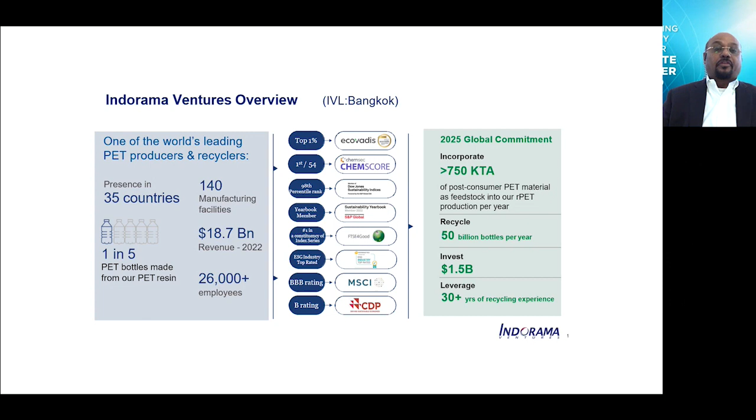So in 2019, Indorama pledged to Ellen MacArthur Foundation that IVL will recycle 750,000 tons of PET by 2025. And that is an equivalent of 50 billion bottles per year. Today, we recycle about 30 to 35 billion bottles in a year. This whole thing will take about $1.5 billion of investment. And we are very well on our way to reach this capacity.

So now to talk a little bit more about PET and recycled PET capacities worldwide, you can see its disproportionately large presence in Asia with next presence in Europe and North America. The numbers we are providing are installed capacities. So installed capacity of PET is approximately 35 million tons worldwide, of which Asia is the largest with 23.3 million tons, followed by Europe at 4.9 million tons and North America at 4.6 million tons. The other regions do have some smaller capacities.

The global utilization rate of PET plants, depending upon the year, the number of force majeures, or other constraints like logistics, usually ranges from about 70% to about 80%. Now, you can also see the installation of recycle capacities worldwide with about 20 million tons of installed capacity. Again, there Asia leads with about 12.6 million tons capacity, followed by Europe at 3.3 million tons and North America at 2.4 million tons.

But when you look at recycled PET, the capacity utilization is not as good as that of virgin PET. It's lower, and mainly it is caused by the collection rates. The availability of raw material to these facilities is limited, and that is one major reason.

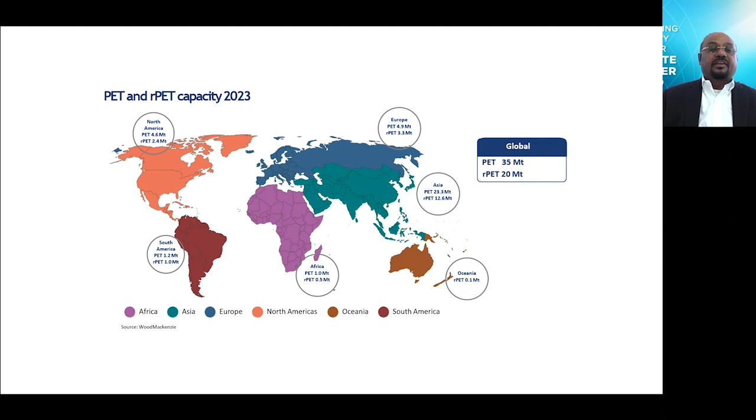Now, having said that, what exactly is Indorama doing in this recycling capacity? I already mentioned that we have this commitment to reach 750,000 tons by 2025 and then double it to 1.5 million tons by 2030. So, even during the pandemic, in the last 4 years, we have added 9 additional sites globally. All the sites marked with green are new sites that we have either built, expanded or acquired. So all this is what we are doing in the mechanical recycling space.

Now, in the mechanical recycling space, what have we done on the technology front? We have developed our own in-house technology for washing the bottles. We deploy state-of-the-art robotics in our plants, especially in regions where it is very difficult to hire people. Our focus is more towards circular economy. So we are installing rPET lines or pelletizing lines, using almost all of the latest generation systems, which can provide the best possible quality, consistency, and the best level of decontamination.

Now, to complement this mechanical recycling, we are also engaged in the commercialization of novel chemical recycling technologies. At Indorama Ventures, we don't do basic research on chemical recycling ourselves, but we do work with technology providers. From a European perspective, many of you might have seen that we have signed up a venture with Carbios to set up a chemical recycling plant in France. At the end of the day, our idea is to ensure that no part of the PET package ends up in landfill.

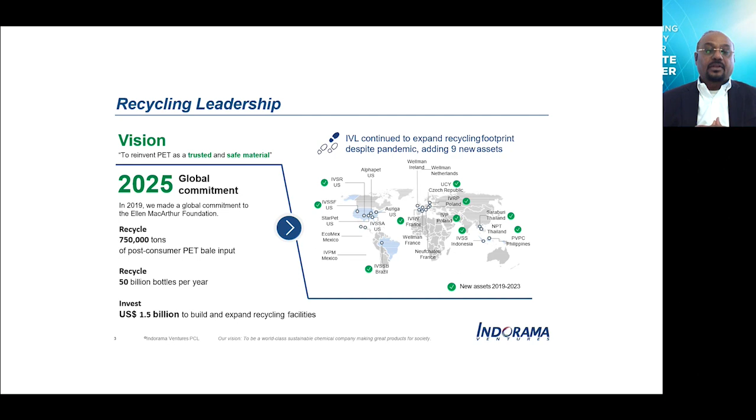Now, why PET? I think I'm preaching to the choir, but still, I will let you all know that PET is the most versatile polymer out there. Whether you are using it in packaging, textiles, industrial, automotive, or hygiene markets, in every industry, PET has the best presence. We all know its attributes like light weight, transparency, clarity.

But on top of all that, it is the most recycled polymer by a big margin when compared to any other type of polymer like polyethylene, polypropylene or polystyrene. And virgin PET comes with the least carbon footprint, and that carbon footprint goes down a lot further when you recycle it. It also competes with quite a lot of other packaging substrates like aluminum, glass, and paper.

So I have given a very small snippet of the LCA comparison, but there is a very recent LCA study that was released by NAPCOR, an industry association for PET in North America, and you can refer to that. It's a more recent study. And so conversion from other polymers and from other substrates to PET continues to happen.

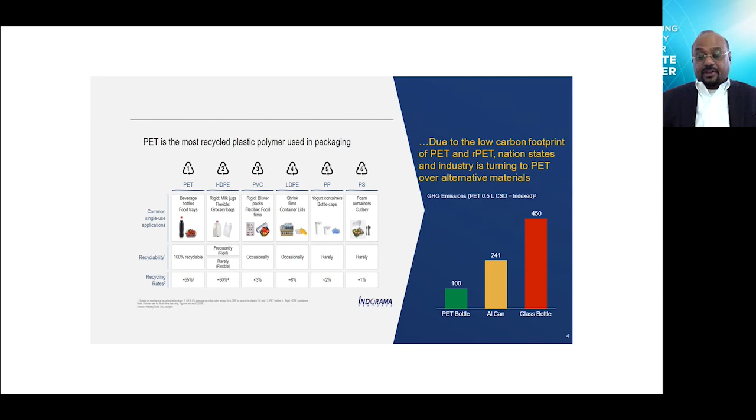But that's not all bad news. I can give you some examples. For example, in the US, the waste management companies have very recently announced big investments in retrofitting some of their material recovery facilities. And that is very good news, and it is very welcome news also.

Now, on the consumer behavior side, the most important aspect that Indorama is focusing on is to educate the consumers. And we think educating people when they are very young is the best way to do it. So we have started, and I think we made a public announcement about it a day or two ago,

wasteheroes.com. This is a website where you can freely download educational material, with levels from kindergarten all the way through high school. And it's done in multiple levels like advanced, medium, all that. And on top of that, it comes in multiple languages and it comes with instructions for the teachers on how to do it. One very important point to note here is this is neither PET centric nor talks about IVL.

This is about handling waste and to educate consumers, especially younger consumers, on the importance of how to handle waste. So, that's one thing on the consumer behavior we do.

And then on the regulation front, many countries are doing the right thing by having deposit return schemes or extended producer responsibility and other collection schemes. Quite a lot of other countries are following. They have announced implementations, but many of these implementations are either slow or not in the right direction. Those things have to improve; that's a big challenge that we need to address.

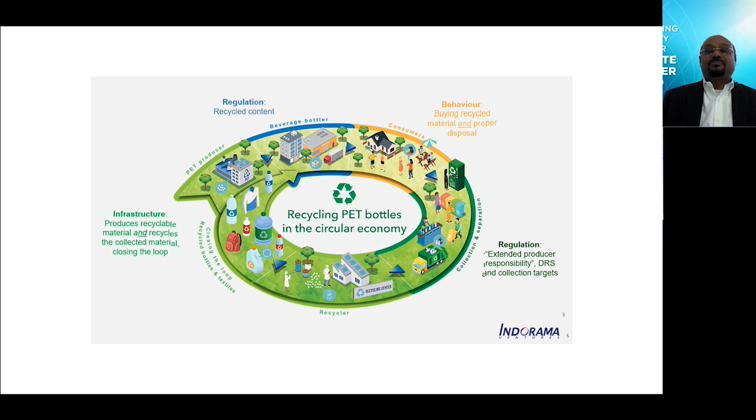Thanks, Shankar. Thank you very much indeed. That's even better than I expected. It's more than just food for thought. That's a banquet. We look forward to following what's happening with IVL in the years to come. And indeed, probably later on this year, we'll see such expansion.

That's great. So next up, we have Paolo De Nardi. Now, Paolo graduated from the University of Padua in 2003 with a degree in materials engineering, and he joined Sipa the same year. He is experienced in R&D, product development, and sales and marketing, so he's quite an all-rounder. He now holds the position of Product Manager Stretch-Blow Moulding at Sipa, and his duties include managing new developments on both linear and rotary stretch-blow moulding machines. And he's going to speak to us today about new investment markets and new trends in PET bottle design and production. Paolo, the floor is yours.

Thank you, Ruari. Let me get the control of your next 10, 12 minutes. Sorry for that. I'll try to make something nice for you and to have some thoughts to be shared within this interesting collection of people, very passionate about this PET. As we all know, PET is really receiving and giving passion to the people that are working on it. Thank you, Shankar, for your presentation. That has given the right pace for my contribution.

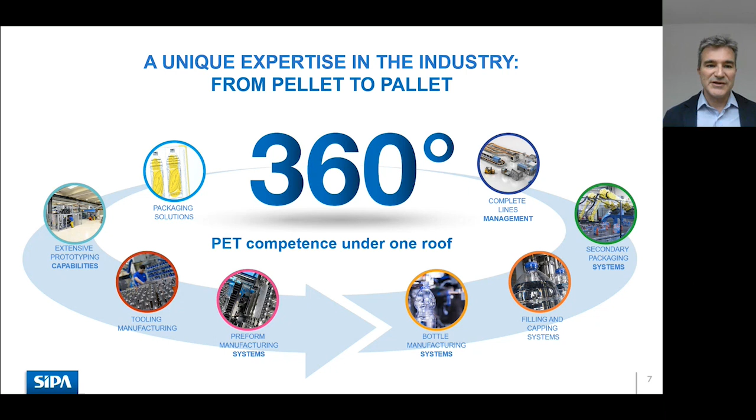That gives us quite a perspective on the market view, and we can share with you three of the main trends that we see from this market, where we see an interesting increase of demands for large size container, large, I would say above 5 liter. Some alternative solution for the conversion of glass. As Shankar was saying, there are a number of conversions ongoing from other plastic to PET, but also from other material to PET. Glass is one of the most recent and most interesting examples, as well as a continuous trend for more sustainable developments in a circular economy approach with different declinations of sustainability.

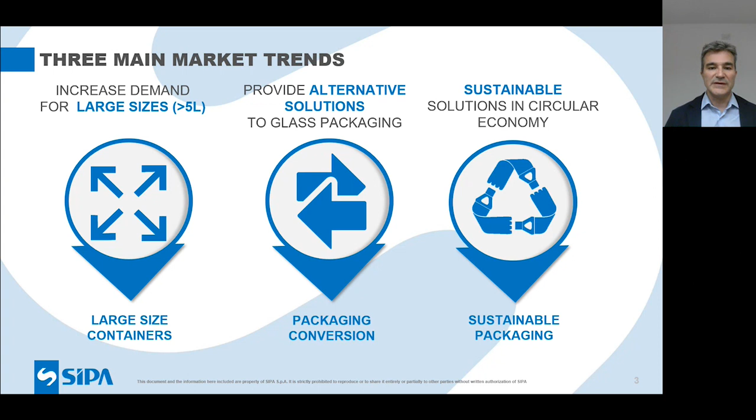And for us, it means development and support of solutions and systems for the large size container to couple with this higher demand of large size, together with some more packaging conversion, I will share some examples of these, and the continuous trend for a more sustainable packaging, starting from the design and with all the features that create a good packaging. What does create a good packaging? Packaging is protection, a great way to protect the food or the liquid using PET. PET is always a very good solution to give protection, but in these three trends, we see some additional protection performance to protect the precious content inside of the bottle.

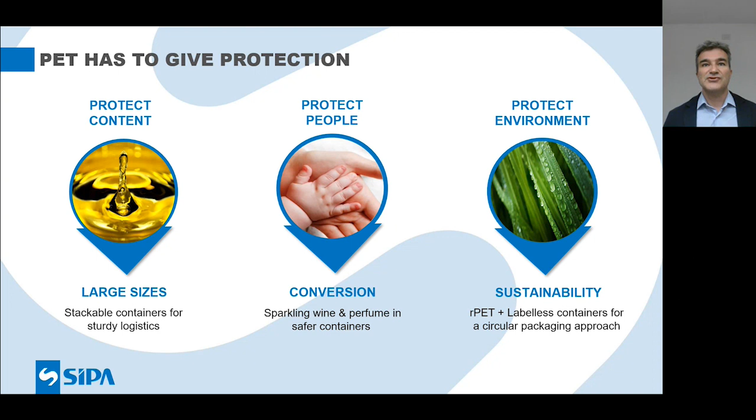And we will see on the large size where we're going to protect with a stackable container for sturdy logistics, a very solid container to protect and transport precious liquid, as well as to protect people, thinking about getting rid of the brittle and fragile glass to have a solid and safer container. And protect the environment, of course, to have a solution that is not only performing well, but is performing well on multiple scales. So considering the world where we are living, the scenario that we need to comply with, to be able to have a sustainable, recyclable packaging, and in general, a circular packaging approach.

So let's start from large size container. Large size is growing. We see trends pretty clear where the big bottles, above 5 liter, are growing. In the mineral water market they are growing a lot. It's an important growth, more than 5%, specifically on the more than 5 liter size. So the market is ready to grow in the next 4 or 5 years. Edible oil as well has an important, relevant growth in the range above 5 liter. And also here, it's important to consider these and to adapt the solutions to these market trends for the next 5 years.

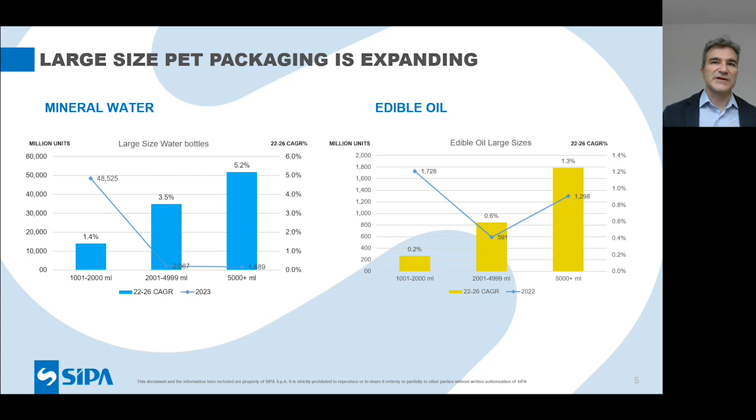So we worked to develop a new, more solid logistic on a 20-liter stackable container that will be presented at Interpack in Düsseldorf in one month. This is the concept: to give more protection to the liquid, the important liquid, to have safe transportation and simple logistic management to reach even the most remote places throughout the world, not just where tap water is easy or the supermarket is close by houses, but to solve the logistic limitation worldwide.

We take care about this because we believe that we can give a contribution to this trend thanks to our full packaging approach. So we consider all the steps to get to this interesting solid solution, starting from the neck, preform design, the closure, the handle, the bottle, of course, and the complete line solution as well, with robotic handling and the proper palletizing of this solid container.

From a technical point of view, it's pretty light: 500 grams, more or less half of the current alternative in HDPE or metal to convey the same 20 liters of liquid. So the ratio between the liquid and the plastic to transport it is really favorable. It is a solid design, not just for precise automatic line automation, but also for the real life of this container, which is mainly transported and managed with severe manual handling. So there is the need for a solid design in all directions, with a very high vertical top load to sustain the real conditions.

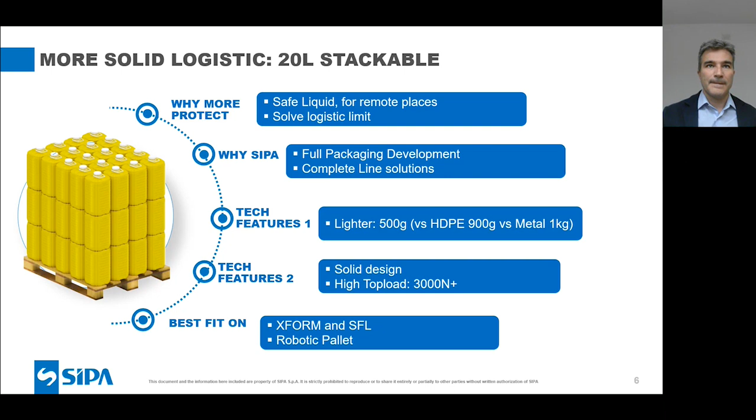We are talking about conversion, so glass is under attack. Of course, we know that the glass price has increased a lot in the last 3-4 years, and this growth is maybe still not close to the end. And we see that markets like wine are concerned about the cost of glass. There is a shortage in France. Today, in these days, we have in Verona, Italy, the leading fair for wineries, where again an important topic is the cost of the raw material that is impacting the final price of the bottle.

But also in cosmetics and luxury, we see that big brands like LVMH are pushing to have more sustainable packaging, and packaging in PET, to go after the need for the market to be more conscious about the real impact of the material choice of the packaging in our daily consumer products.

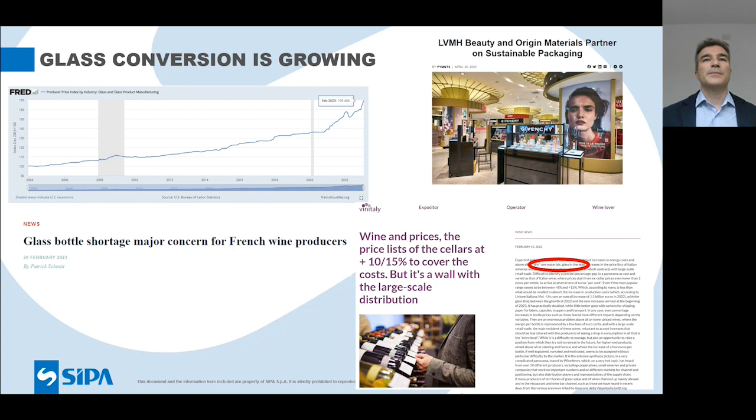So we are introducing this sparkling wine bottle, the first sparkling wine in the world where we convert the classic 750 ml sparkling wine from glass to PET, to transport the liquid safely. I'm talking from North Italy, where the production of wine and the value of sparkling wine is really important. So we know that it's an important liquid. We can protect it for up to 24 months with a completely unbreakable solution, very solid, very simple, very nice to handle in the hand.

And we take care, again, of the full packaging development, starting from the cork neck. So from the existing typical cork neck and metal cage, we developed a special neck in PET to mimic the classic glass one. The very special, patented preform design and the bottle design have a very heavy solid base in order to maintain the shape even with high pressurization. And all of this within our solution in terms of design and industrialization is being patented.

In the end, it's a solution to have a PET bottle with a lower cost than glass, of course, with simple logistics, much simpler to manage a PET bottle, or even to have just-in-time in-house production of PET bottles. And it's environment-friendly, because as Shankar was saying, NAPCOR also confirmed that PET uses much less greenhouse gases than glass or aluminum.

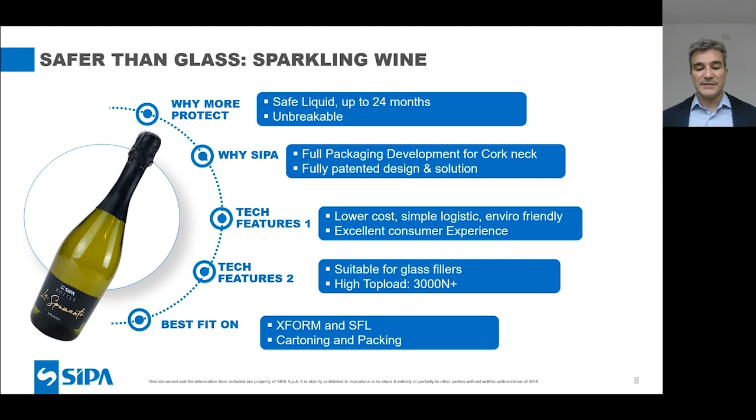Another interesting conversion to share with you is a perfume bottle we presented in Cosmopack a few weeks ago in Bologna. There is the need to give more protection with an unbreakable solution for the cosmetic, with easy and safe logistics, without the need to consider the risk to scratch, damage, or break a very important and expensive container, having all the flexibility of a PET in terms of color, shape, change. Full design options are open.

Of course, we apply again the neck and the specific preform design to have a very fast prototyping to give the market this container, but it's an option for any kind of new solution, new geometry, new sizes in this perfume market. The consumer experience is very good because the container is solid like rock, even using a much lighter amount of material than glass, and of course using less greenhouse gases, with a simple production, just one machine to have the solution close to the

brand owner factory. I was speaking about lightweighting, think about 80% less. So it's an important saving, with all the contribution to the lower cost, talking about energy, raw material, logistics, and at the end, the benefit for the environment. This is produced on a single step machine, the ECS-SP, for super special containers, but as well can be adopted on other more high volume platforms.

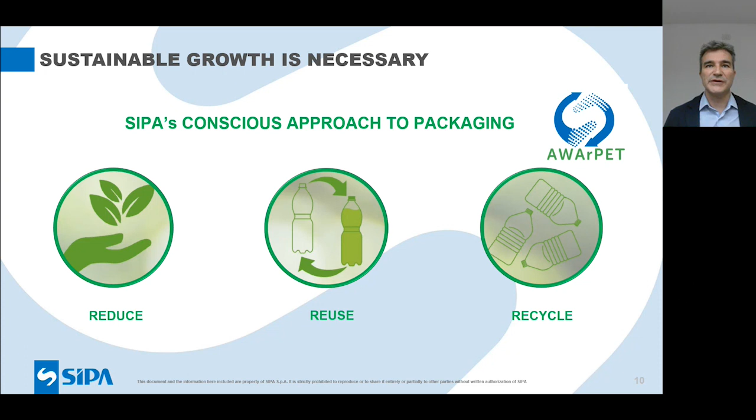We call AWArPET the concept to have all features in our hand since the beginning, since the first scratch idea, to guide people to a sustainable solution in the design, in the choice of materials, colors, and so on. Here is a quick example. Of course, the use of rPET is everywhere. All the big brands are pushing like hell to have much higher, up to 100% recycled PET in their bottles. And the solution is clearly available. So to get rid of virgin fossil fuel, to drop CO2, because as soon as we use recycled PET, we have a lower impact, lower production of CO2 for each gram of plastic.

And we take care, in all the development steps with our design approach, starting from the neck, the preform, the label choice, the glue selection, the color of the resin, the additives, and so on, in order to have less plastic, less emission, less impact. From a technical point of view, using our systems, we can contribute a better or more flexible heating system to adapt to various quality resins coming from recycling, that may be one of the variables introduced, or quality controls to monitor the performance and the real output of the bottle production.

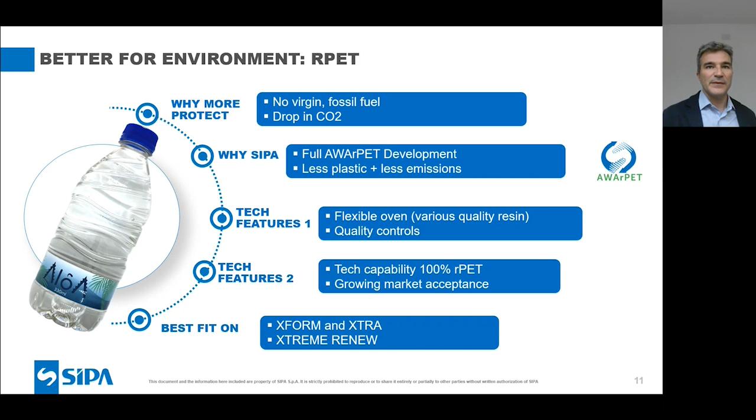I conclude with label-less. There is another important trend: in order to have less fossil fuel, or better, no fossil fuel, using 100% rPET, remove even additional plastic like the label, and embed the label feature on the packaging. So it's a new way to design, considering this option to have less plastic, to have a shelf differentiation. Of course, I'm removing the nice color and pictograms and graphics on the label, but I move to a more transparent container, embedding the label topic on the design.

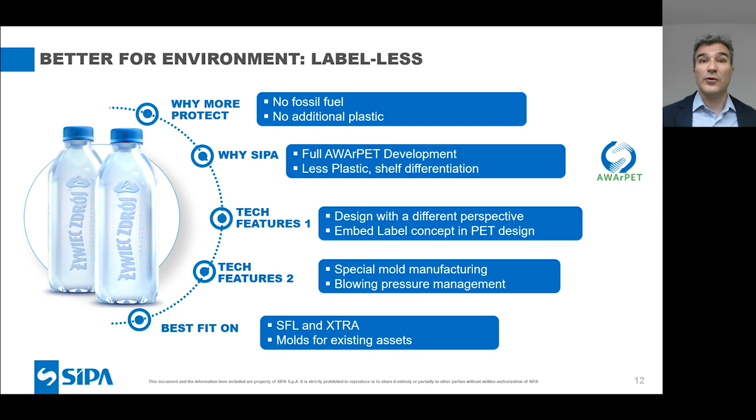This is, of course, opening a new option and new constraint on the design itself, introducing also some opportunity to have a special mold manufacturing. Blowing pressure must be accurate in order to apply this negative or positive impression to the logo and to all the marks to be solid and readable by the people. This can be in linear system, rotary system, or even on blow mold for existing assets.

To make a long story short, it's key from our point of view to manage all these 5 trends, 5 examples that we shared, to manage the full process know-how. So starting from raw material know-how and selection, of course, considering rPET as the best option, apply all the best design expertise in all the steps of the development to get the final consumer product. Get a little bit of flexibility, why not Italian flexibility, to design and invent solutions on plastic and on the systems and new solution development.

Add a touch of design for recycling feature down to the end of the line, so from pellet to pallet, in order to manage all these topics in all the steps down to the warehouse filling, or even down to the last consumer to use this bottle.

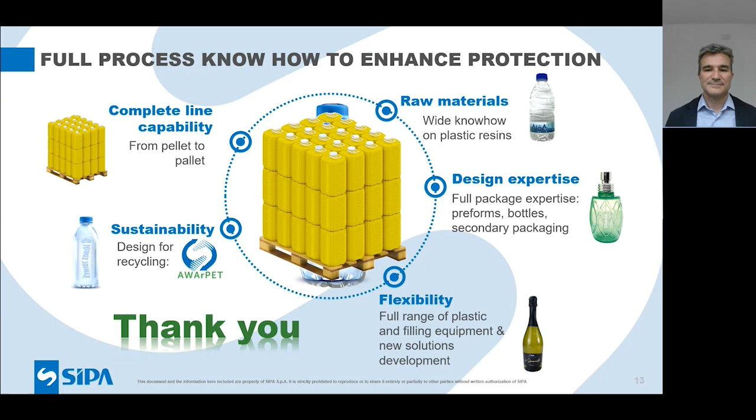Thanks, Paolo. That was great. It was quite a fascinating presentation. I will ask you later about the sparkling wine container. That's a subject that's very close to my own heart. But we'll talk about that later when we have the questions.

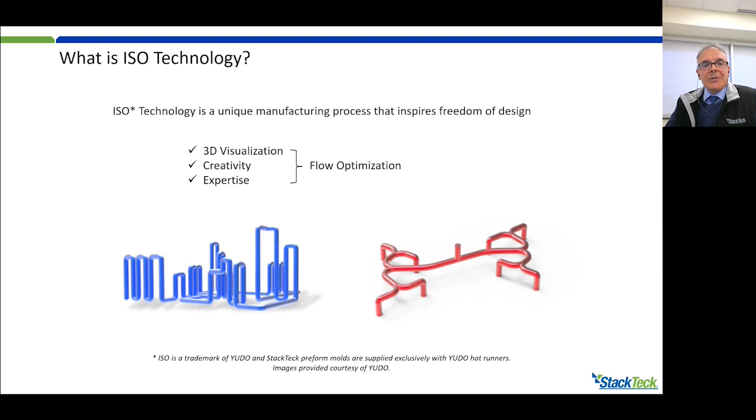To prepare for diffusion bonding, the melt channels are machined directly on the surfaces of the adjoining steel plates, then polished and accurately mated together. A notable characteristic of diffusion bonding is that it doesn't use any form of brazing, soldering, or welding. There's no paste, no flux, or bonding elements used at all. The adjoining plates are simply in direct contact with each other during the entire process.

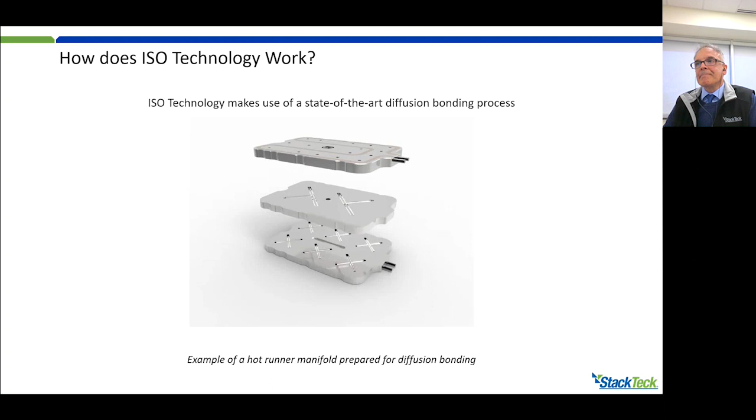So the next phase involves applying a high pressure and heat to the plates, just below their yield point. This is maintained for a period of time around 15 to 20 hours, depending upon the plate sizes used. So during this time, a molecular exchange takes place across the plates. And just as gases and liquids diffuse, solids do as well under the right conditions. And once the process is completed, the result is the creation of a single-piece manifold. It's robust, it's accurate, and it has no risk of separation.

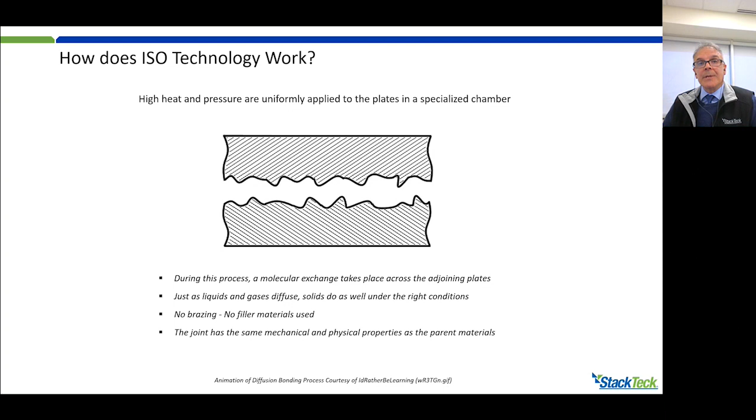So why do we do this? Well, I'll show you a comparison that highlights this technology. Traditionally, manifolds are manufactured using gun-drilled linear channels that interconnect within a steel block, kind of shown on the left. You can see here in the red channel lines that these lines are drilled from the side and then plugged. Here's another one that's drilled from the back and plugged, another one here that's drilled from the back and plugged, and then they interconnect to form a melt channel to each drop.

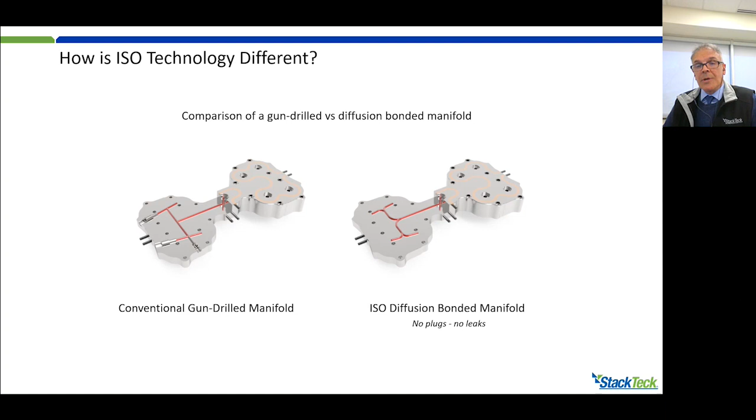Now, when diffusion bonding is employed, as shown on the right, it allows the entire channel arrangement to be simplified without the complications of using end plugs, so there's no risk of leaks. The melt channels can be contoured and shaped to provide an optimized flow path to each cavity.

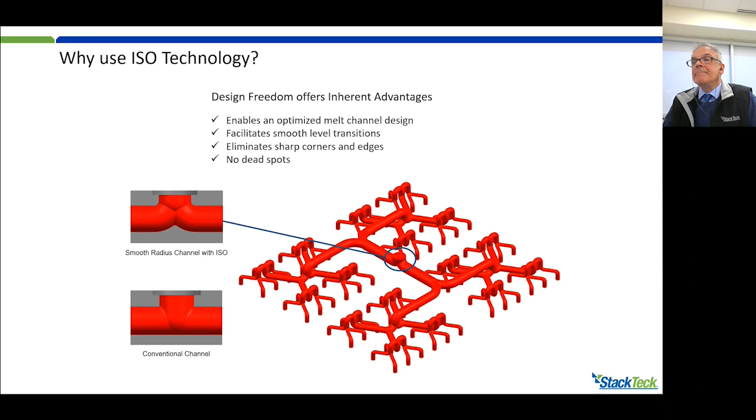In this example, the weight variation was reduced from 46% to 19%, and that's the percent relative range, which is the maximum range of all the parts divided by the average weight. The improved uniformity with ISO translates into a larger processing window for molding, minimizing the need to adjust and tweak parameters for the outlier preforms, those ones that may be on the edge of acceptable quality.

This makes setting up the process conditions easier and quicker, such as when speeding up cycle times or when starting up a new mold. There's less need to make adjustments to fix quality problems on the outlier preforms. And as a downstream benefit, the customer in this example reported less bottle-to-bottle quality variations at the blow molder.

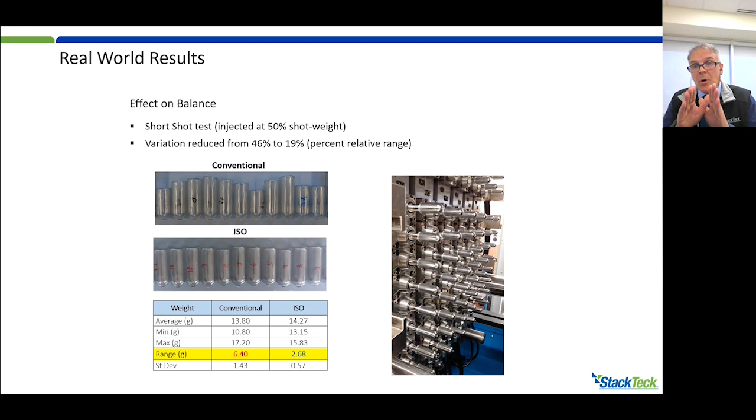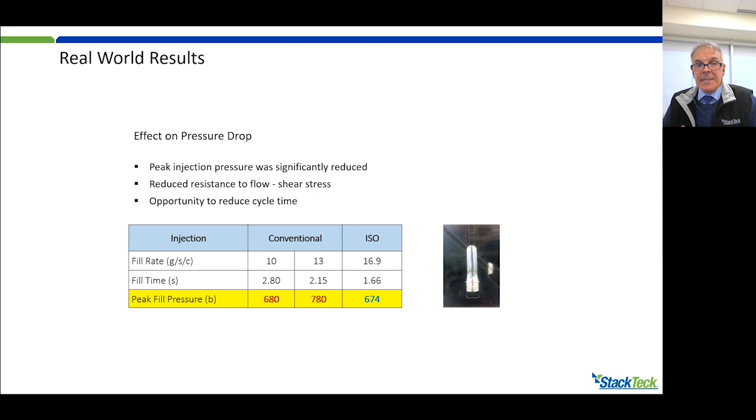With our ISO hot runner, we were able to achieve a 16.9 gram per second per cavity injection rate, yet still achieve a slightly lower peak pressure than the slowest injection rate using the conventional hot runner. The preforms made in each case were checked under a polarized light to confirm that no changes in stress pattern were visible. The end result was a significant injection time reduction, which reduced the overall cycle time.

So these two characteristics, the improved balance and the reduced pressure drop, enable technologies such as overmolding and thin wall preforms to be accurately and consistently molded. Overmolded preforms tend to have very thin layers with high L/T ratios, and this requires both a tight cavity-to-cavity shot balance and a low pressure drop throughout the hot runner to ensure the layers are accurately and consistently formed with no risk of short shooting the very thin layers.

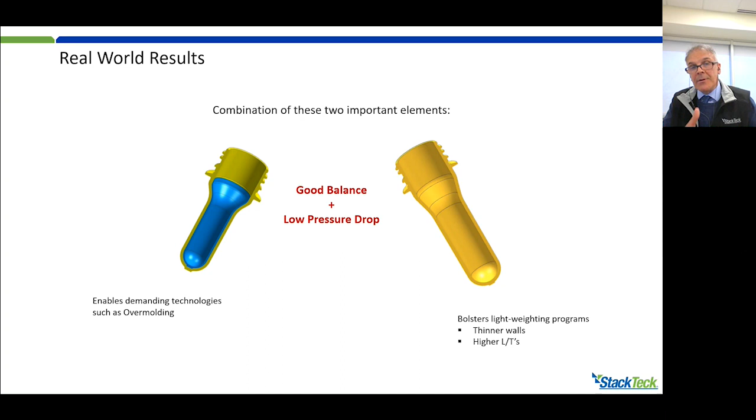This also benefits monolayer preforms, most notably with flat water applications, especially as they become thinner and thinner due to lightweighting programs.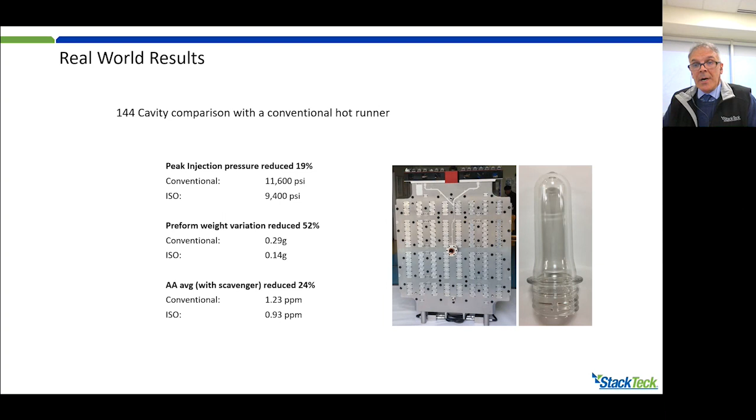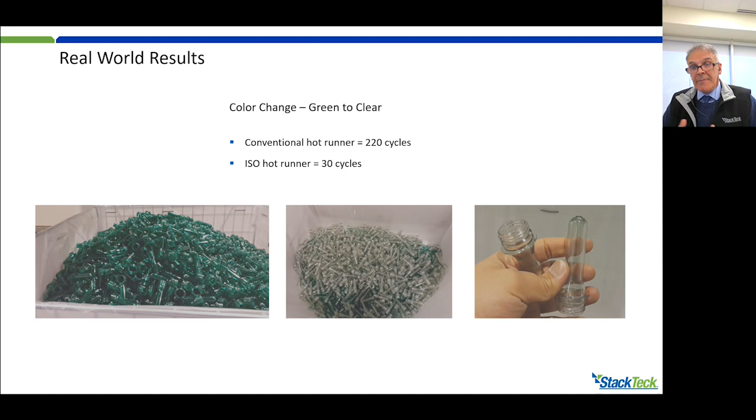So where else can we use this technology? Well, I'd like to introduce now KoolTrack. It is another way we take advantage of our diffusion bonding technology, and it also helps to improve product quality and cycle time, but now on the cold half side. So KoolTrack is best described, or more simply described, as conformal cooling. Similar to how ISO diffusion bonding changes the way hot runners are designed and manufactured, the same three-dimensional design creativity can be applied to cold halves.

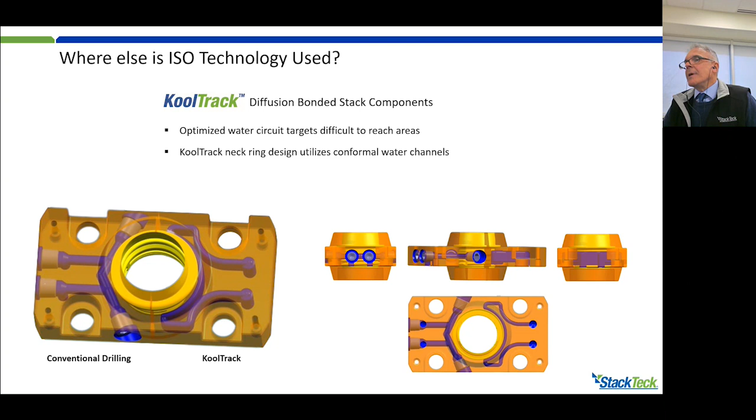With the StackTeck mold using KoolTrack, we were able to target the critical dimensions of the PCO 1881 neck finish, especially the B1 thread dimension, which has a wall thickness just over 2 millimeters, and the pilfer-proof band, which has a wall thickness of just over 3 millimeters. And these thread dimensions are considered relatively thick when compared to the 2.6 millimeter body wall thickness of this preform.

So KoolTrack was able to reduce the preform thread temperature by 14 Celsius. And interestingly, that was achieved at a cycle time that was about half a second faster than conventional. So in this case, both KoolTrack and the ISO hot runner technologies were key elements to this achievement.

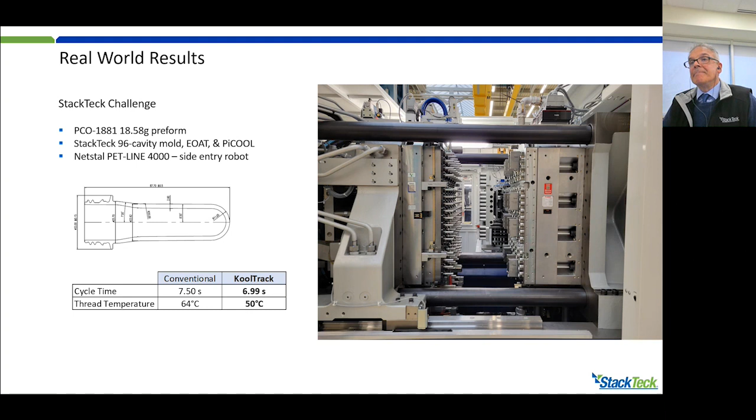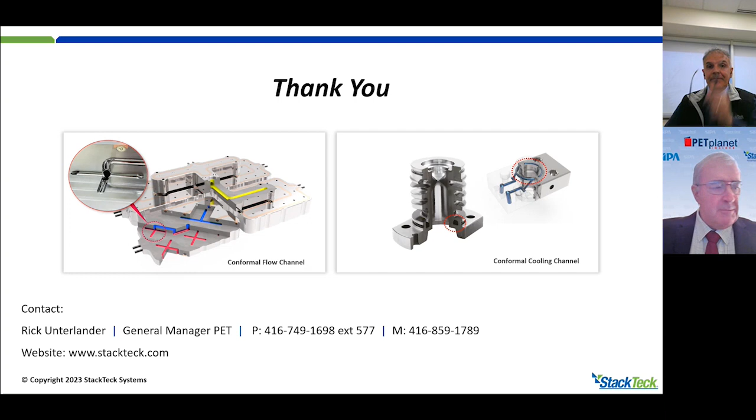Now, the joining process that you were talking about there, it reminds me of friction welding, which is a form of forging. Is it similar, or is it indeed friction welding? It's not friction welding. They're just placed in contact with each other under a level load and high heat just below the yield point, but for quite a long time. And what happens is, through contact and under those conditions, the molecules actually exchange surfaces, and they go from one to the other, but there's no friction involved. But it is held there for quite some time to do that.

So it's a really robust process. And eventually 2 pieces or 3 pieces, 4 pieces, whatever amount of plates you have, truly become one piece. Right. Like no bonding elements. No, yeah. Okay.